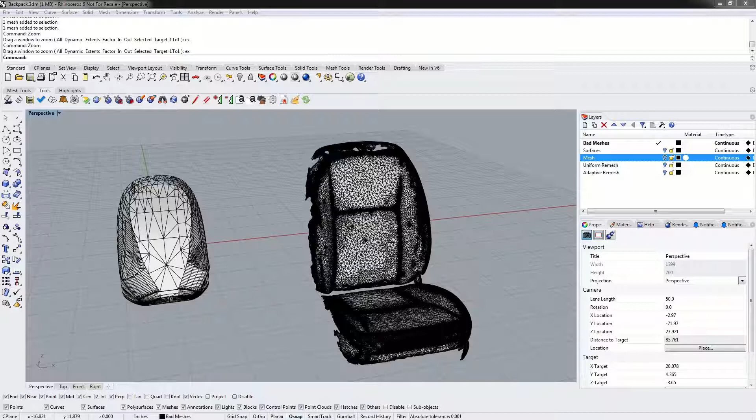Hello and welcome to this video on what makes a mesh good or bad. In this video we will show two different styles of meshes.

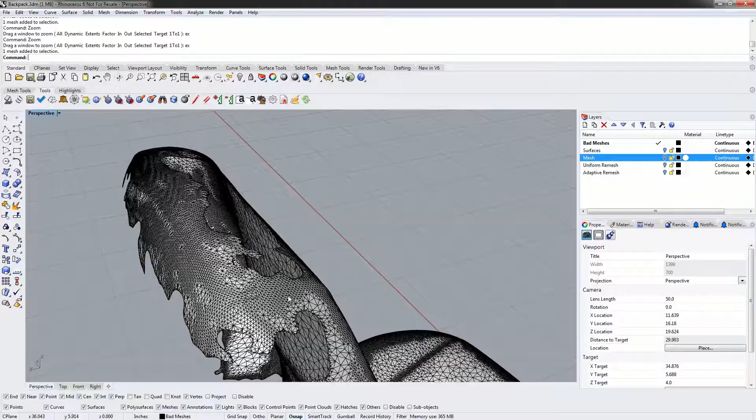The first mesh on the right is the result of a laser scan. As we can see, this mesh has a lot of triangles, and when we look at the edges, they are not smooth straight lines as we would expect from a pattern piece. This is what's referred to as ragged edges. The mesh also has a number of holes in it.

If we try to flatten this with ExactFlat, we will get a pattern, however, it will not resemble the pattern that you would expect.

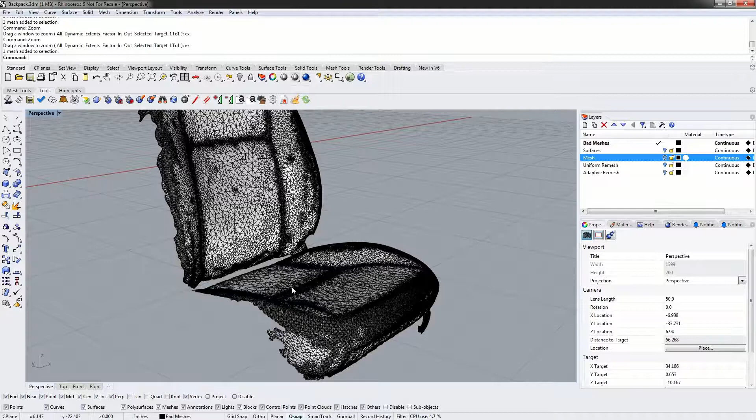Although you can clean this up and fix this mesh in Rhino, it is best to use the tools that come with your 3D scanning package to fix up the mesh. Your 3D scanning software will have specialty tools for trimming the edges, filling in holes, and splitting up your mesh.

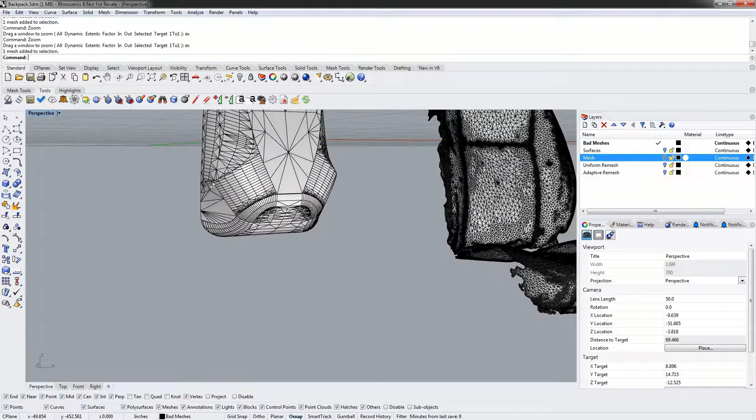The next mesh we're going to look at is the result of Rhino. This mesh was created by selecting multiple surfaces and using the Rhino mesh command. When we start looking at the mesh, it doesn't look too bad. However, if we start examining the mesh closely, we can see that we start having holes in the mesh. We can see right through the pieces.

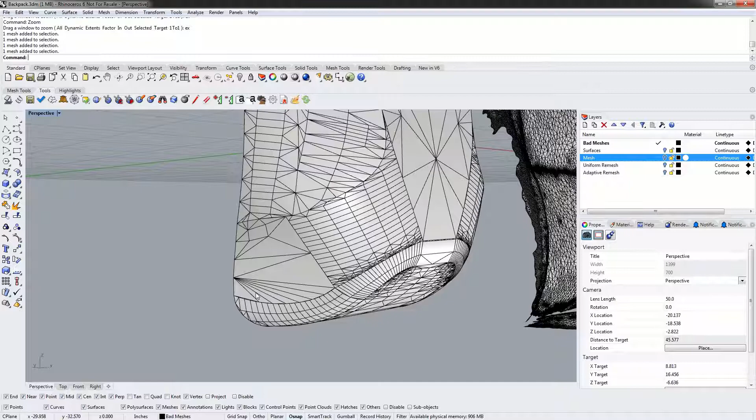When we start looking at the triangles themselves, we have very large triangles right up next against very small triangles. We also have a collection of very high aspect ratio triangles, that is, triangles that have very long edges along with triangles with very small edges.

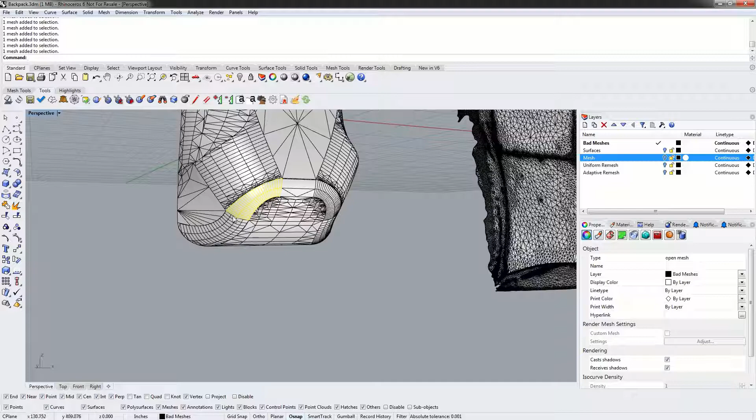Also, because these were individual surfaces that were meshed, if we start examining the edges, we'll notice many instances where the triangulation along one edge does not correspond to the triangulation along the opposite edge. Although ExactFlat will do its best to sew these together, it's not always guaranteed for these to sew together. As such, this would be considered a bad mesh.

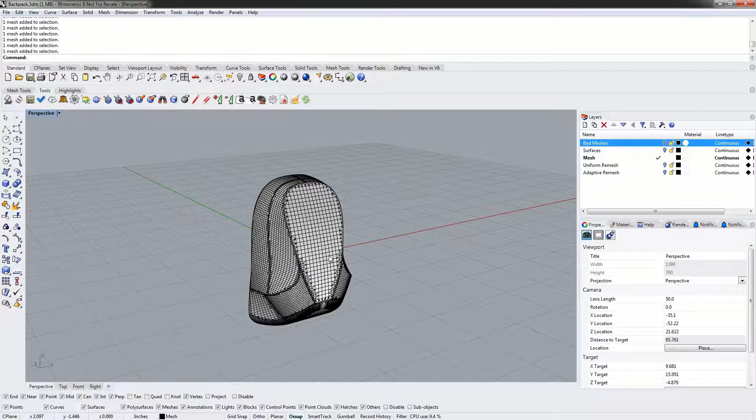An example of a good mesh is one that has uniform triangle distribution and all the seams or joints between the meshes are consistent. This mesh was also created using the Rhino mesh command. However, before we created a mesh, all of the surfaces were joined together to form one closed poly surface. We then used the Rhino mesh command and went into the detailed controls and manually specified maximum edge length.

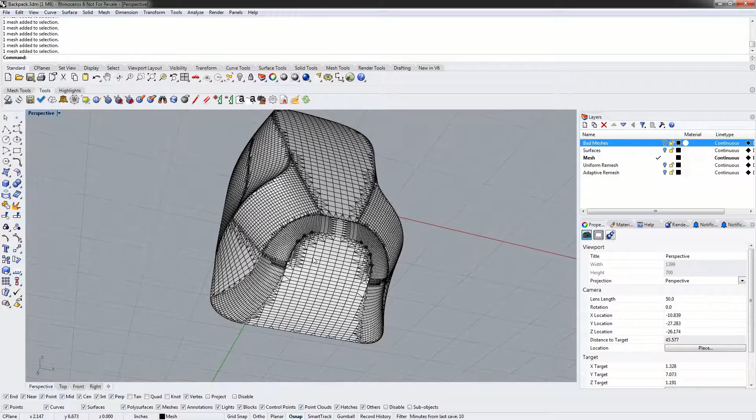This is how we were able to create a grid of triangles and quads on the back and on the front. We have guaranteed that we have limited the ability of the mesher to create triangles with a very high aspect ratio by manually specifying the mesh parameters.

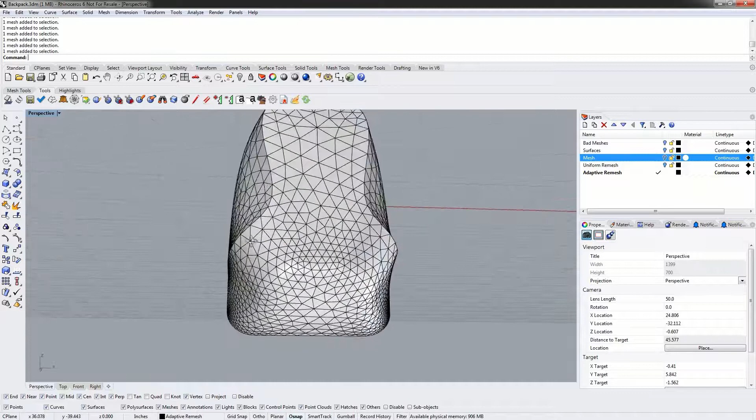Once you have your meshes created, it is best to use the adaptive remesher to reprocess your mesh and create an even further refined mesh for use with ExactFlat. The adaptive remesher will ensure that all the triangles are more or less equilateral, and that when a change in triangle size is required, a very smooth gradation of triangles is created to accommodate the change in triangle size. ExactFlat will only add additional triangles where additional detail is required, such as to accommodate complex curvature or very sharp angles in the mesh.